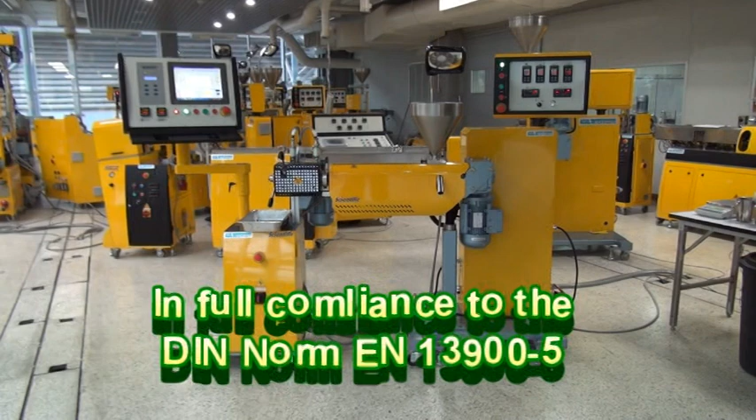This is our filter tester type LFT34GP with a 20mm extruder LE20-30. This filter tester is one which is in full compliance to the DIN norm. And with this video I will explain in detail how to run this filter tester.

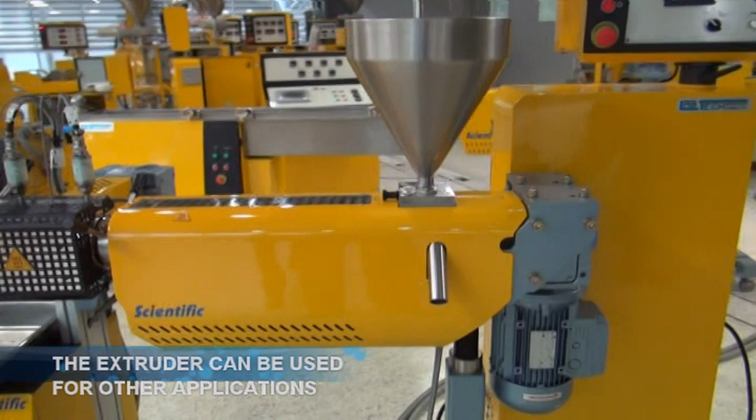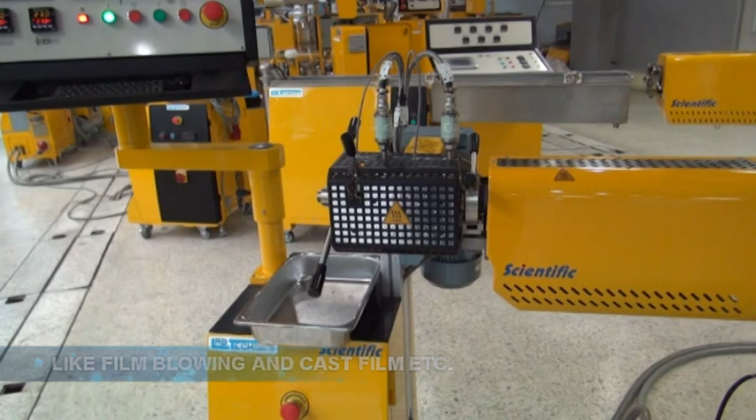So with this filter tester you have a separate extruder which has its own control panel, and the idea of this is that you can use this extruder for some other application. You can, for instance, connect it to a film blowing line or something else. And then you have also here the filter test head completely separated and only connected to the extruder with a C-clamp, as you can see here.

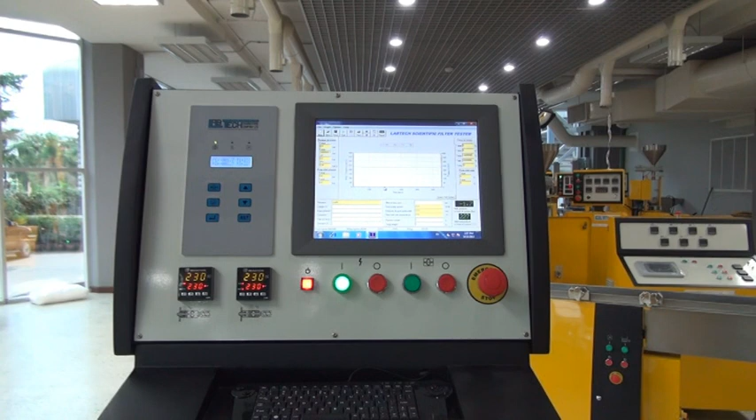And the filter tester here has its own control panel with a touch screen which will show the pressure build up and the graphs in real time during the test. I will go into detail on this later on.

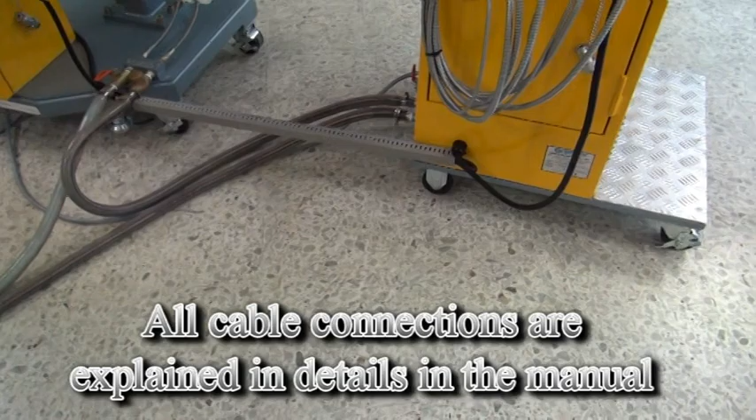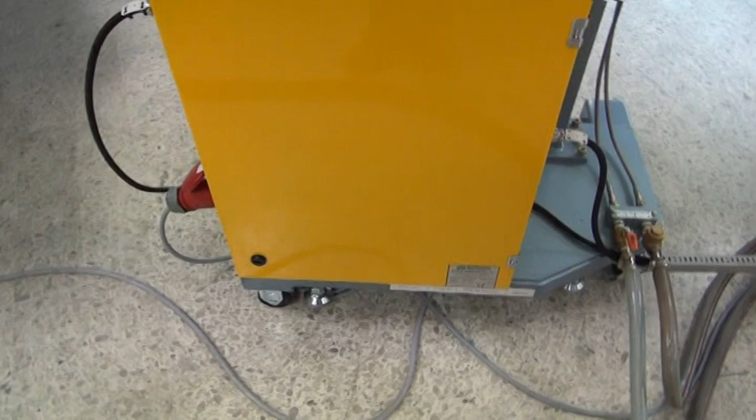We have here two main cables which connect to the extruder. The one up you see here, and another one on the bottom here of the panel. Both these cables are going to the extruder. One goes to the front side or front cabinet, as you see here, and the other one goes to the back, as you see here. And you should check in the manual. We explain exactly how to connect these, and it's very important that you follow the instructions in the manual.

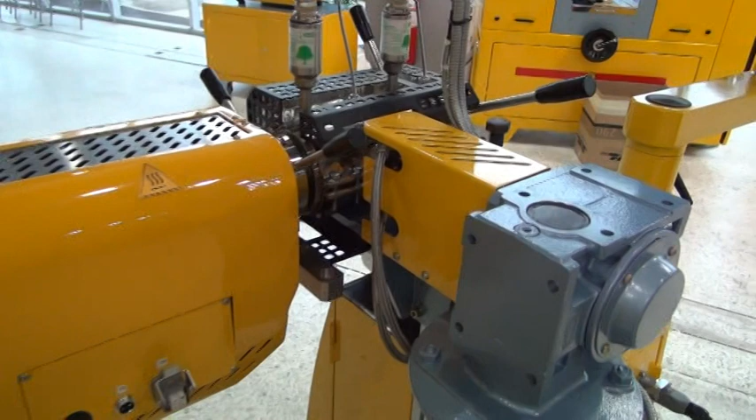And of course you also have to connect water. Water you have to connect to the filter tester also, because we use water cooling on the gear pump, on the shaft to the gear pump. Actually the shaft going into the actual gear pump body, and that one has to be cooled with water. And then on the extruder we have water cooling on the infeed barrel. So these connections have to be made also, but this is also mentioned in the manual.

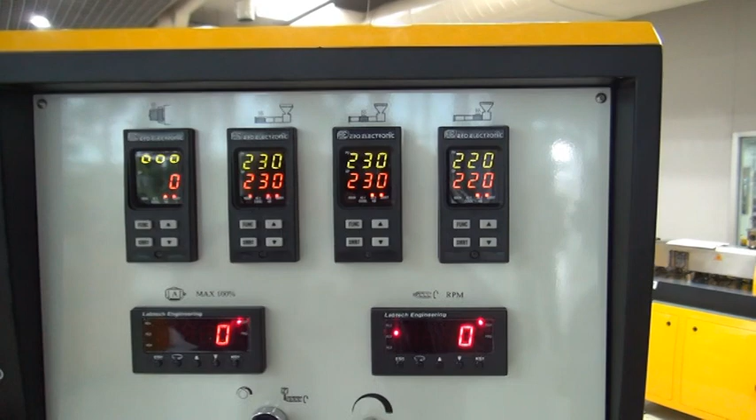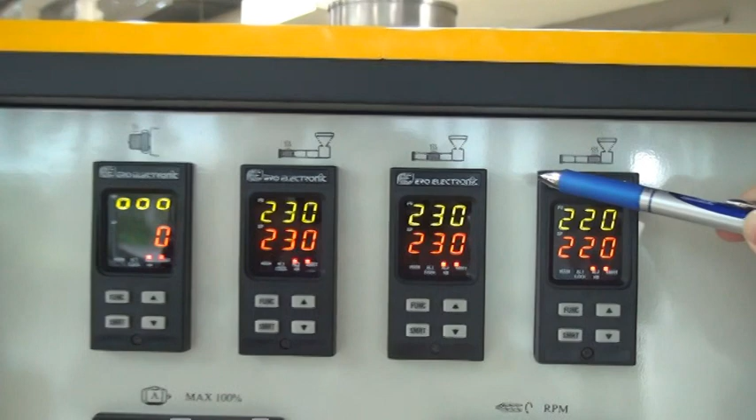So here on the control panel you have three active temperature controllers, and on top of the controller you can see the symbol which zone they are controlling. And then you have a fourth controller here which is not in use because the filter test head has its separate temperature controllers. So this one we don't need to use for this application.

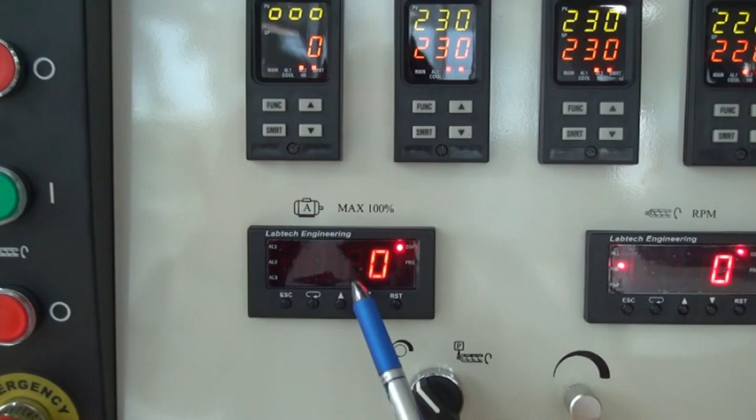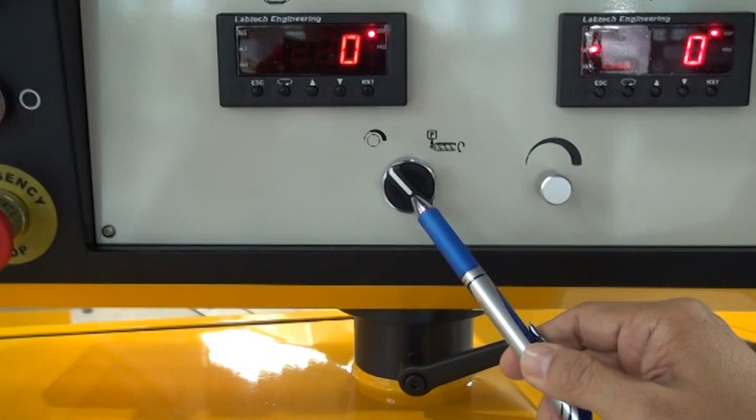And below here you have an instrument showing the max ampere in percent of full ampere for the motor. And here to the right you have a setting of the digital display of the RPM, screw RPM. And below there you have a potentiometer where you set the screw RPM. And then again to the left here we have a selector switch where you select to run the test in manual or in auto mode.

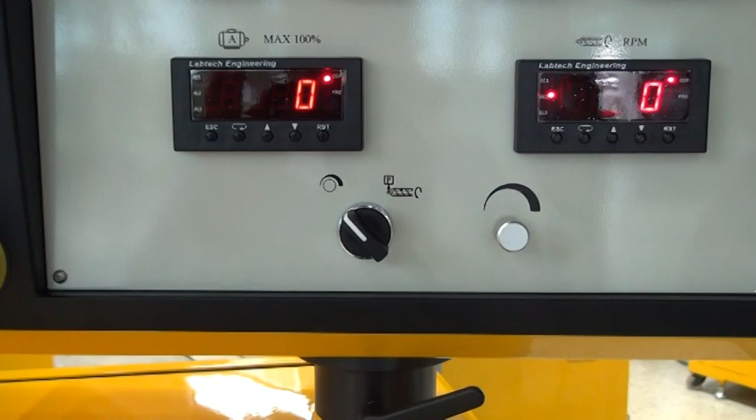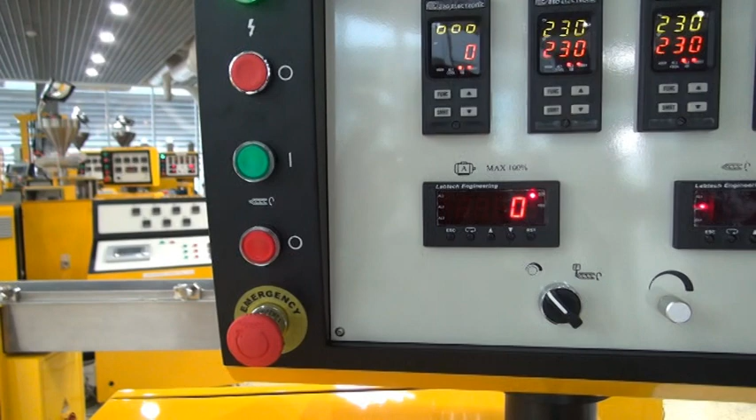Okay, and here on the left side we have the control buttons. You have one button to start all the controls. That is the upper green button, and then you have another green button below there to start the extruder screw. And below you have, of course, the stop button, the red one, and then you have an emergency button, which will stop everything when you press it.

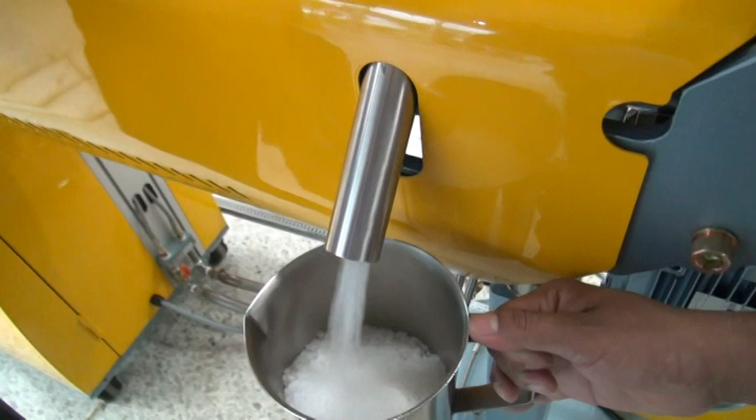The extruder has our standard hopper. It also has our standard mirror, so you can see the level of the resin inside the hopper. So below here you have the turret valve, and in this position as it is now, the material goes down straight into the infeed section of the extruder. And when you turn the hopper here, this is the position where you can empty out the hopper, and then you can turn further to a third position like this that will stop also the infeed, so it closes everything. And then we go back to the start position where the material goes down into the extruder.

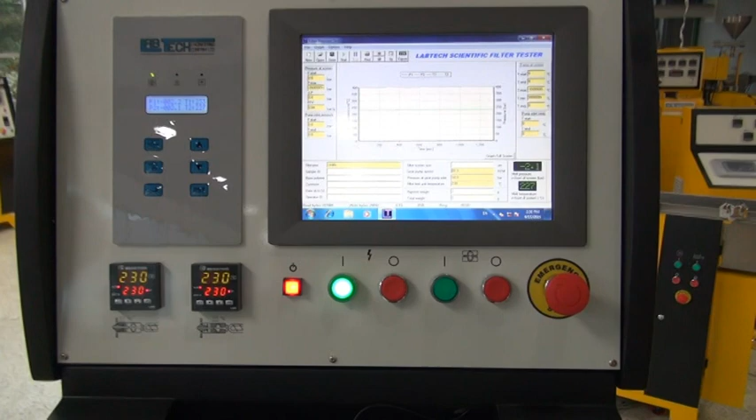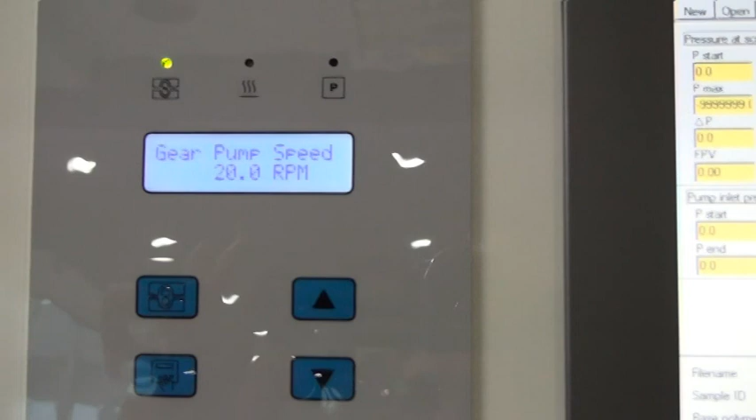So here is the control panel for the filter tester, and on the left here you have buttons to control the various functions for the gear pump and to set the temperatures. So here you press the gear pump button, and then you can increase or decrease the speed, and then you enter here, and then you have set that value, and then you can press the inlet pressure of the gear pump here, up and down, whatever value you want, but usually we run at 50 bar. That's the value we normally set, and then you enter that also here. Okay.

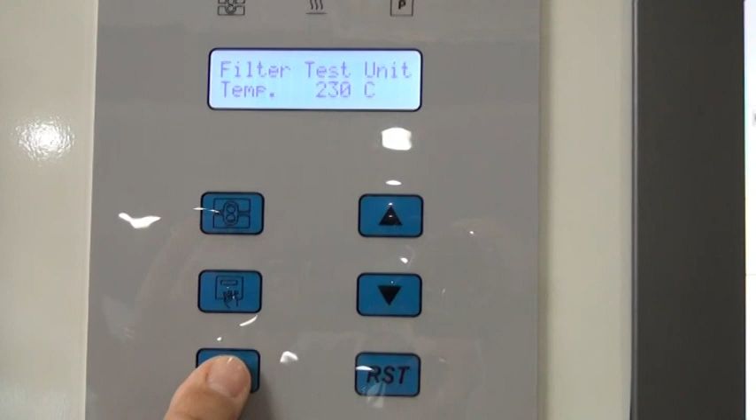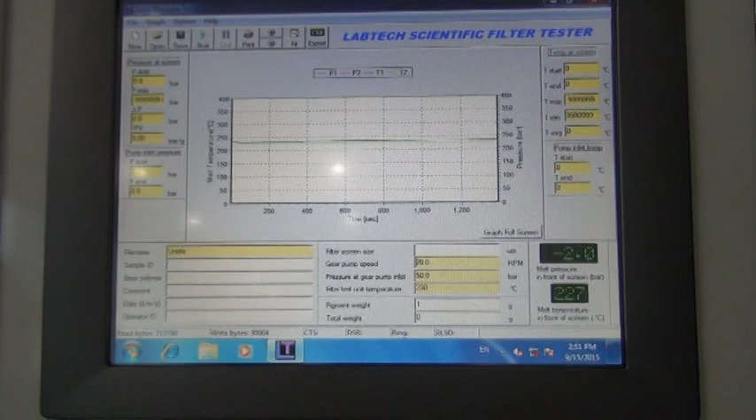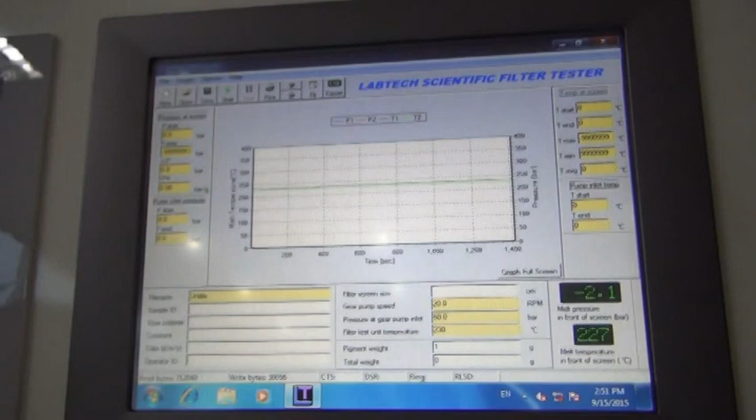And here you have the main screen where you will see the filter pressure building up on the screen. You will have a graph coming when we run the test. And on the lower part here, you can key in the value of your test. You can use a keyboard here to key in, but you can also use a touchscreen keyboard if you prefer that. Then you just press there, you get the keyboard, and then you can key in the values of the test you put.

So here in this window you can key in the file name and the sample ID and the base polymer you use and any comments you have on the test, and then you have the date and the name of the operator. And on the right side here you will have the data for the test, the gear pump. It will come in automatically once you set the gear pump speed, and the pressure of the inlet will also come up here, and filter test temperature.

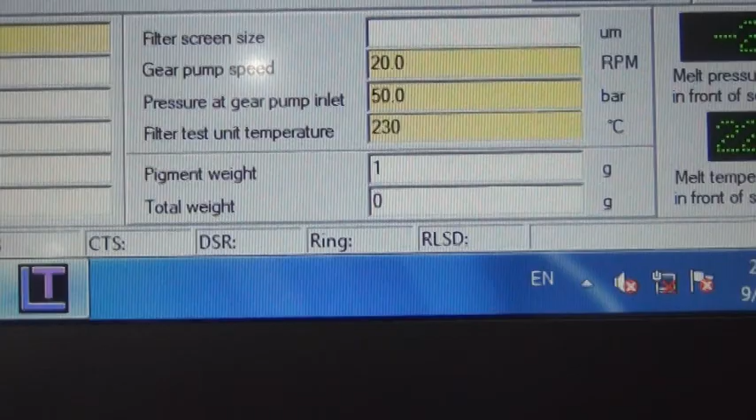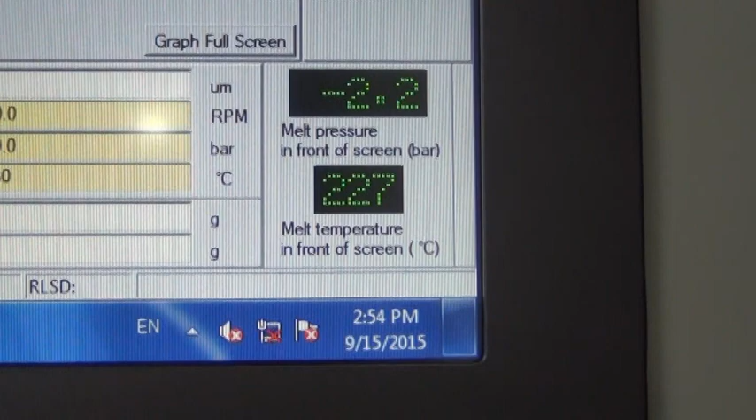And below that you will also key in the pigment weight of your sample and the total weight. And after you have keyed in that, this computer will calculate the filter test value. And here on the black windows you have the melt pressure in bar, which is shown when it's running. Now we're not running, so it shows a minus value actually. And then you have the melt temperature, which will also show the temperature of the melt once we run the line.

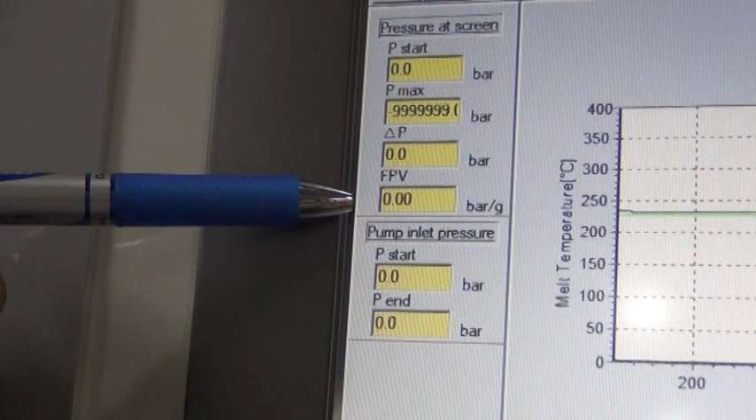On the left side you have the P start value, the starting pressure, and below that you have the maximum pressure for the test, and then you have the delta P, which is the pressure difference from start and end, and then we will calculate the filter FPV value once you have keyed in how many grams of the pigment you use in your master batch, so we have in the batch here.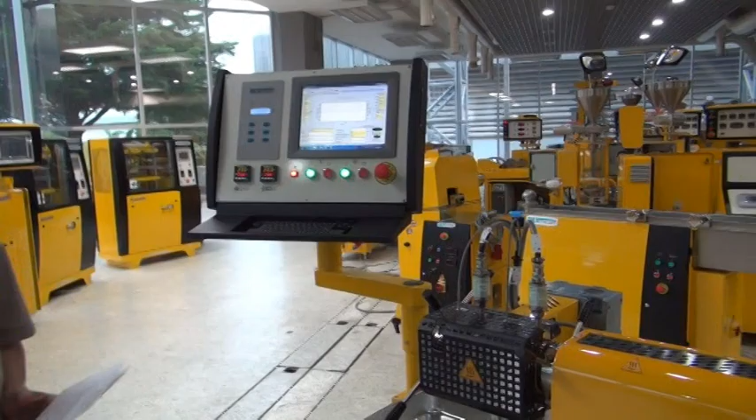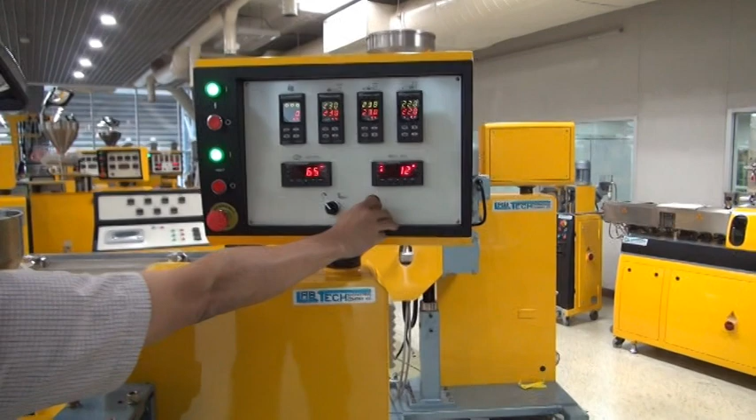So now we will start the test. We will start with cleaning the extruder, and the first thing we start is the gear pump, which we start up here on the control panel, and then we will start the extruder. Now we are running in manual mode, and we set the RPM to around 40. And virgin PP resin we have here in the hopper, which we will use for the cleaning, as you can see.

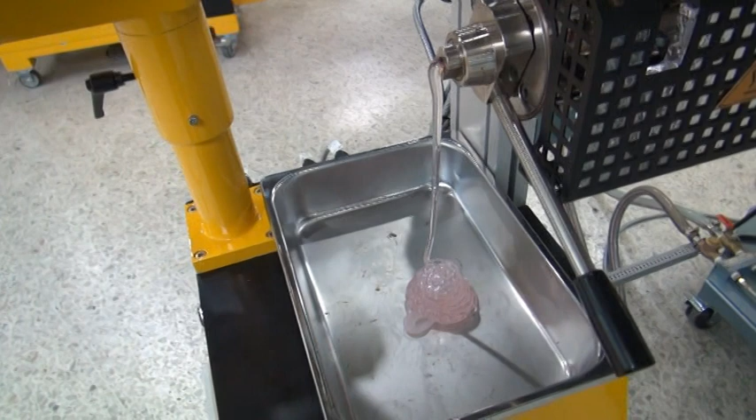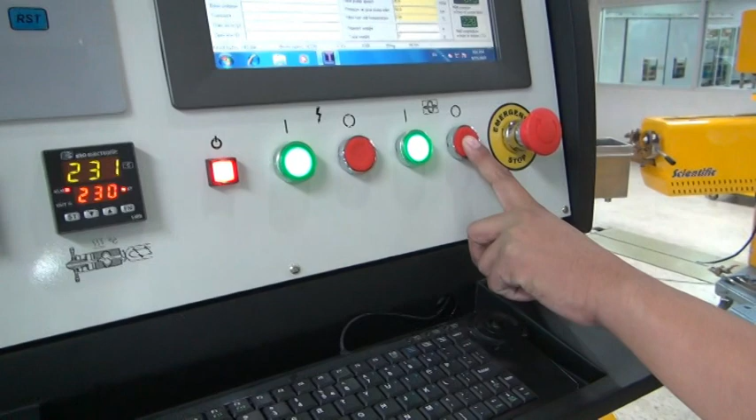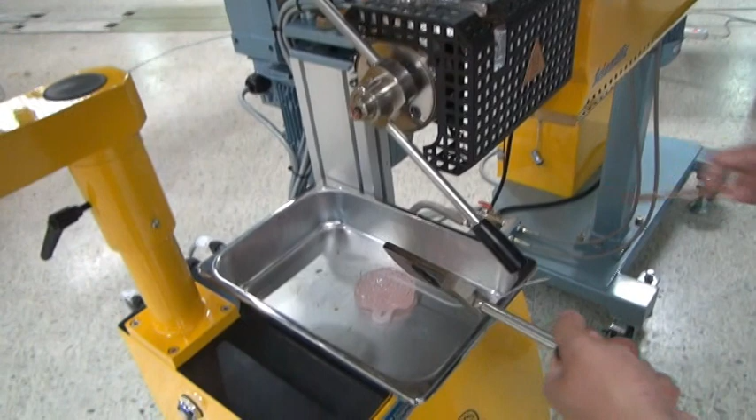So the screw is now clean, so we don't need to run more of the PP for cleaning. So we will stop the extruder now, and then we will empty out some of the PP resin here. Okay, and then we will change the screen. I mean, we will insert the screen because now we don't have any screen. We stop the gear pump, of course, when we insert the screen. Okay. And we have to clean the retainer a little bit.

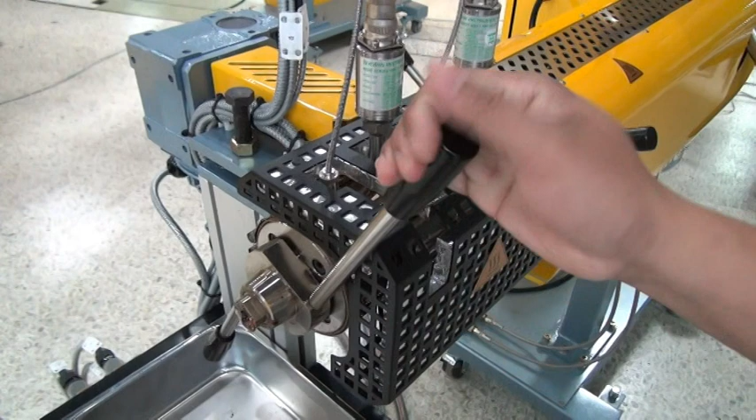So now we will put the screen into the retainer, and then we mount the retainer into the slot here on the filter test head, on there, and then we clamp the screen. So now we have inserted the screen. What is the size of the screen? 10 micron screen. Okay.

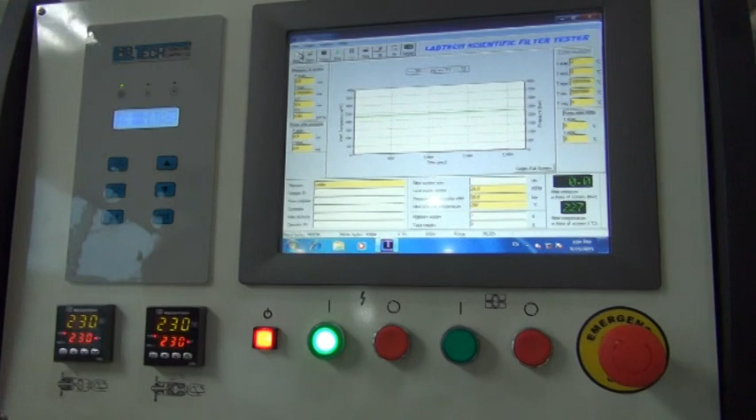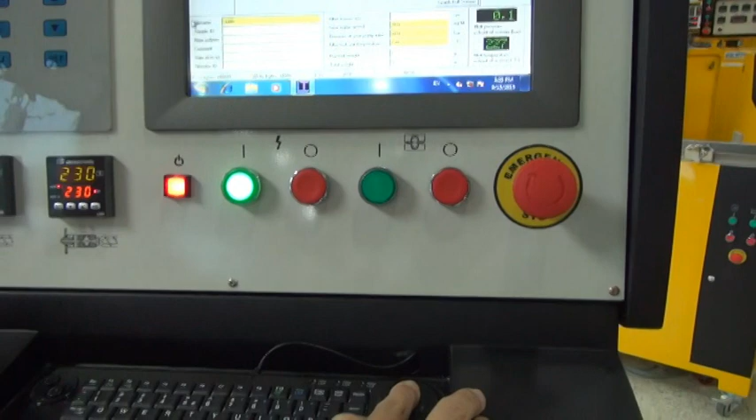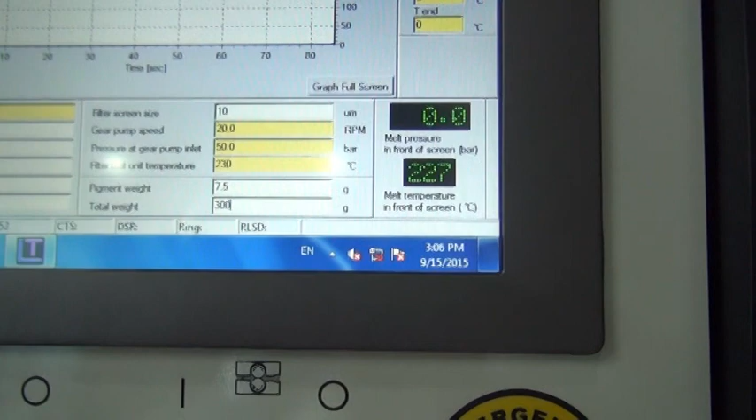So before we start the test, we press the reset button here to reset all the data on the control, and then on the screen here we will start a new test, and we press OK there, and then we key in the data for the batch. So here we have keyed in test data. It's only fictive anyhow, but the important thing we have keyed in here is that we have a 10 micron screen, and that the test has 7.5 grams of pigment weight, and the test batch size is 300 grams.

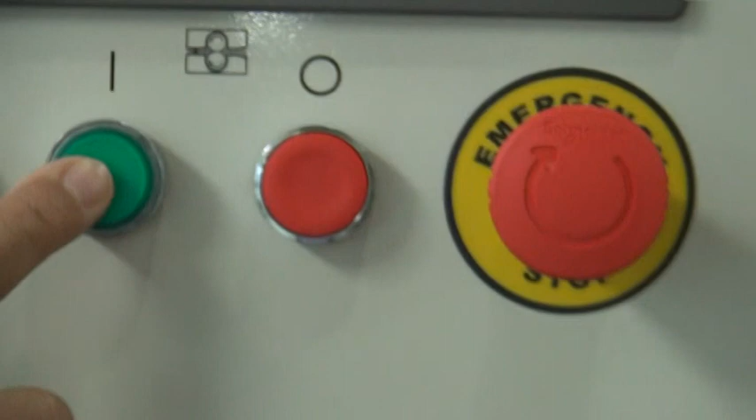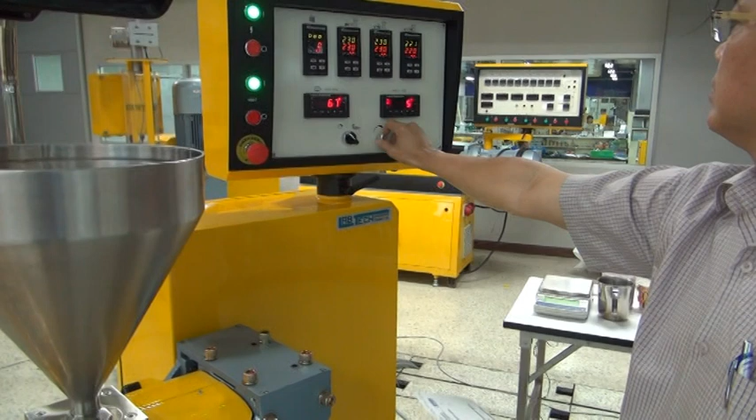So now we are ready to start the test. And we press the start button for the gear pump, and then we press the start button for the extruder, and we go up to 40 RPM, and we are still in manual mode. Now we go over to auto mode.

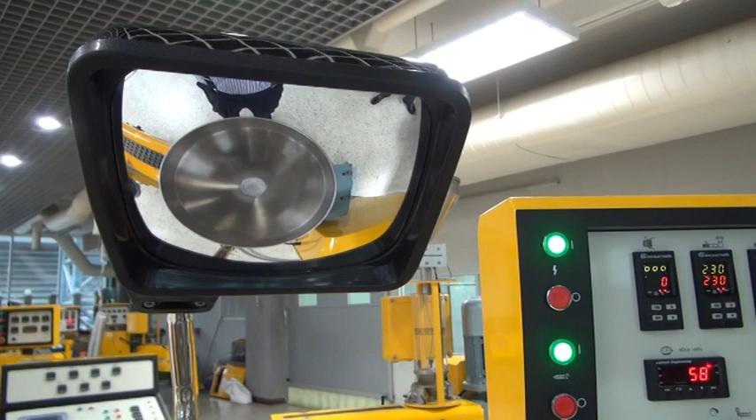When we look inside here, you can see when the hopper starts to get empty, it is time to fill in the test batch. And that we do. No, it should be there. Oh, okay. Well, we did that already. So here we have the test batch.

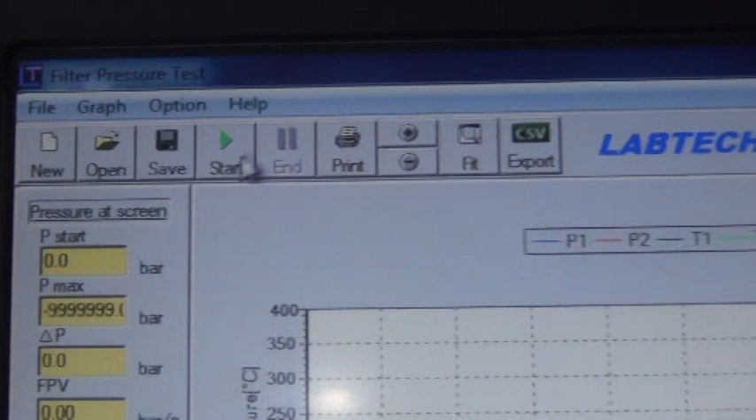So now we will watch here until the color comes out from the melt here, then it's time to start the test, and then we press the start button on the screen, the one you see up here. This one you press once you have seen the color coming out, or you press OK here. Okay. So we are still waiting. Now here the color is coming out, so it's time to press the start button. So now the actual test has started.

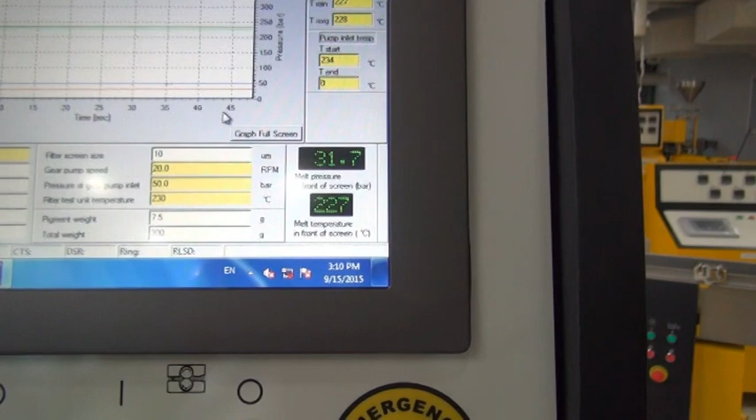And we should eventually see a pressure curve coming, but not yet. It doesn't show yet. You can see that this one has started to come up. Now it's 30 bar, 31 bar, 31.7. We started at 30 bar. So it will come up slowly, and there will be a graph plotted eventually. You see the lower red line here is the pressure line, and this one should climb up.

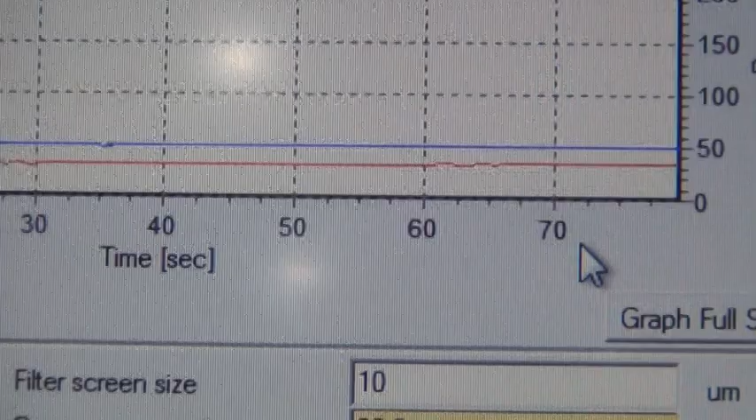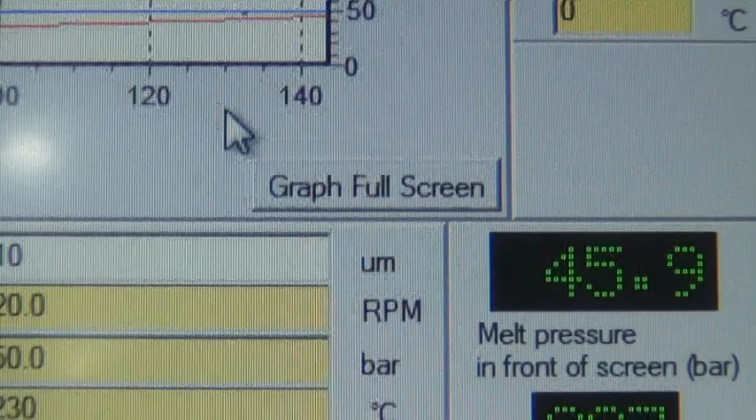With time, we have to wait and see. Pressure is now 33.7, on the 34 bar, so it's climbing. Okay, we have now been running for a few minutes here, and the pressure is now up to 45 or 46 bar, and you can see the red line here is climbing.

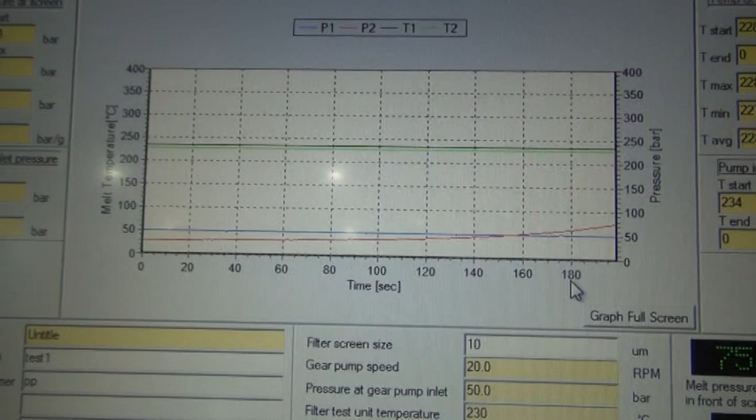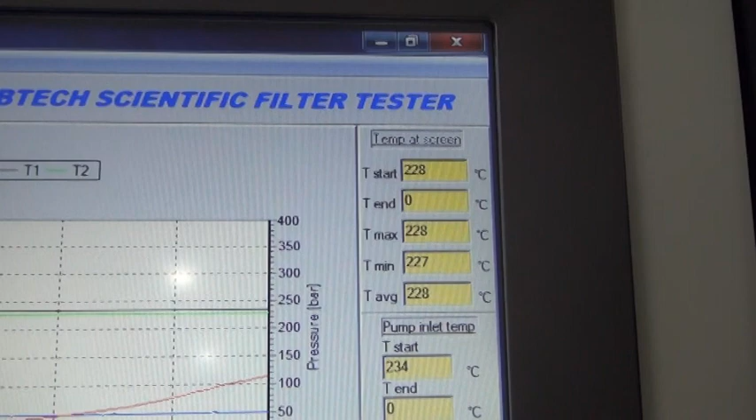Also, I didn't explain the graphs here, or the lines you have here. The blue line you see near the red line here is the actual pressure on the inlet pressure of the gear pump, and up here the green line you see is the melt temperature. Now you can clearly see that the red curve is climbing, and we are already up to 110 bar. And also the melt temperature is constant all the time, which it should be. It's 228 degrees, as you can see here.

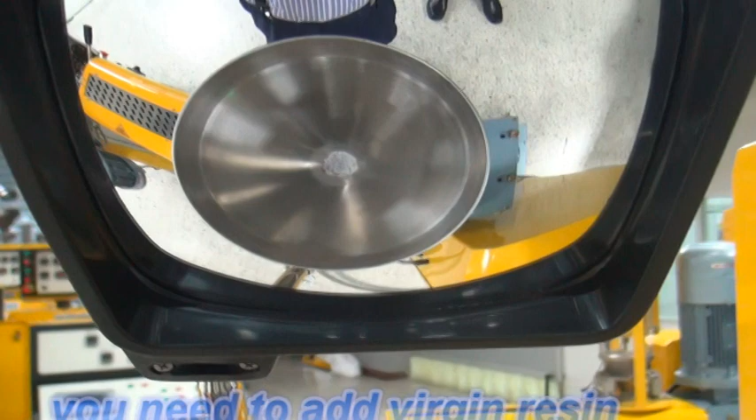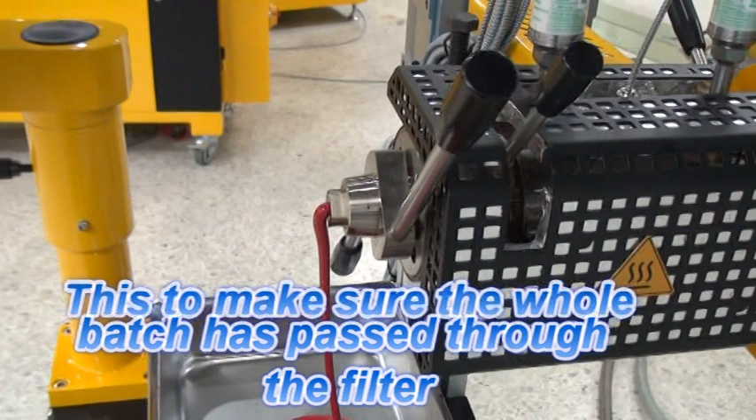So now the test batch is almost finished, and then we will add another 200 grams of virgin resin, which is going to push out all the material which you have in the screw. So you can be sure that you test the whole batch of 300 grams. So the pressure is still climbing quite nicely here. We are almost up to 200 bar now, as you can see. And the test is still going on.

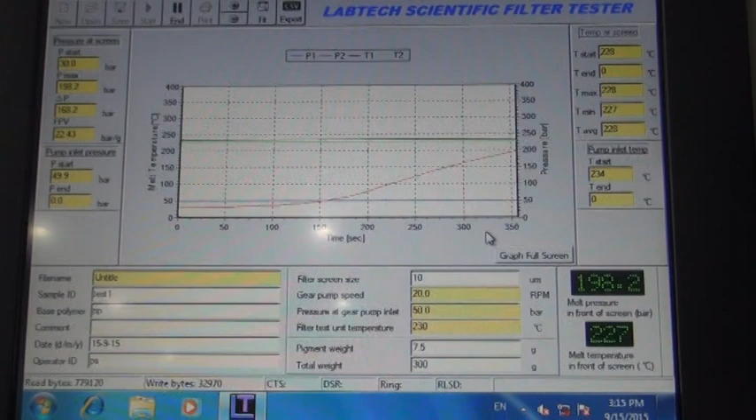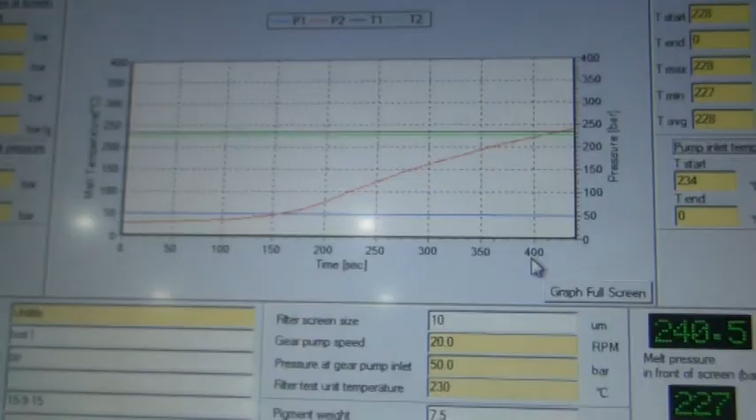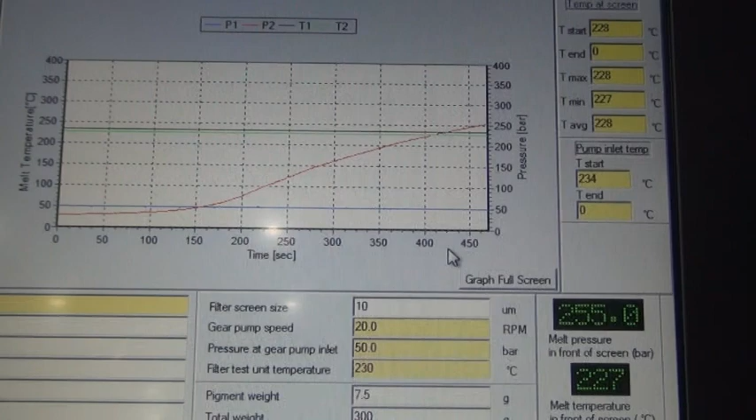And the purging batch here of 200 grams is still in the hopper. And we can stop the test once this batch is almost finished, because then we are sure that all the master batch has gone through the filter and been tested. You can see on the lower ruler down here how many seconds the test has taken, and from there you can see we are now at 400 seconds, and it's still going on. We are 500. Now we are at 450 seconds. And the curve is still climbing. We are up to 255 bar.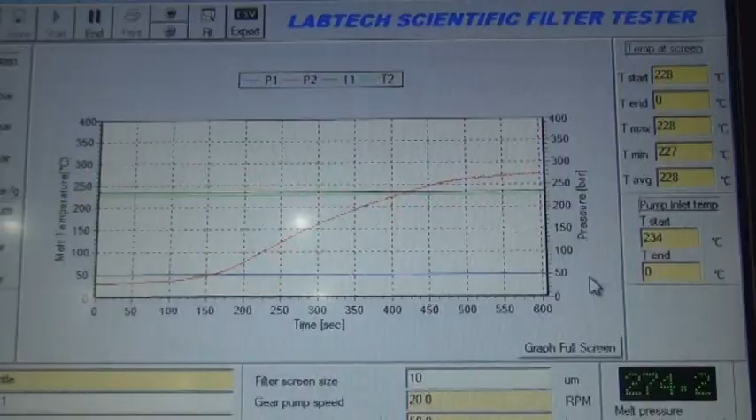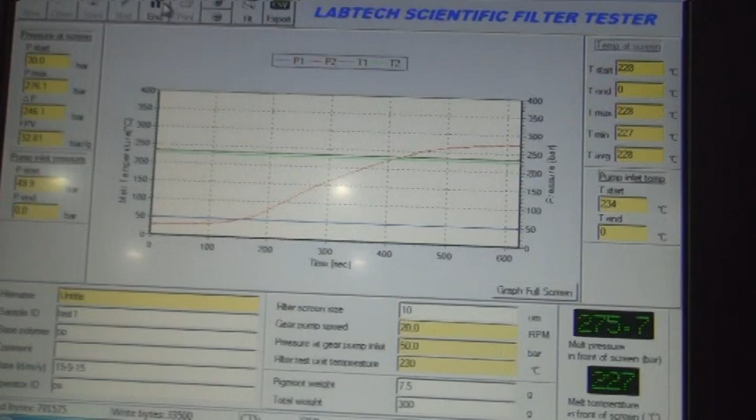So you can see that the graph starts to level out, which means that most of the master batch has already passed through the filter, and now we have more of the cleaning resin or the virgin resin coming through the filter. So now you can see that pressure is leveling out completely. It's not going up anymore. It's still here 275, 274. So now we can actually stop the test, because not more will happen. Yep. You press the stop button here. And then we can save. And then you save the curve or the graph or the result.

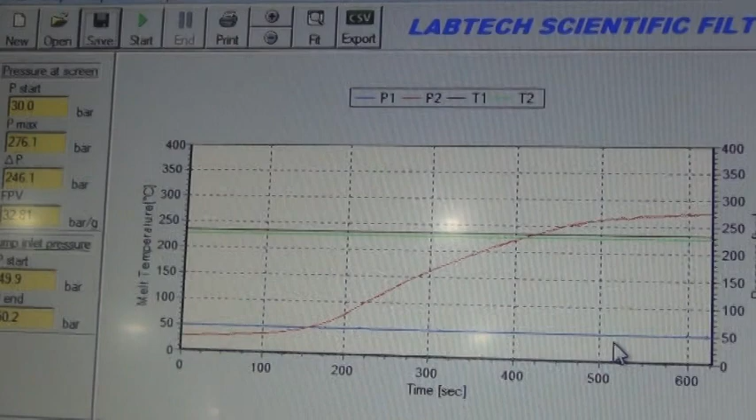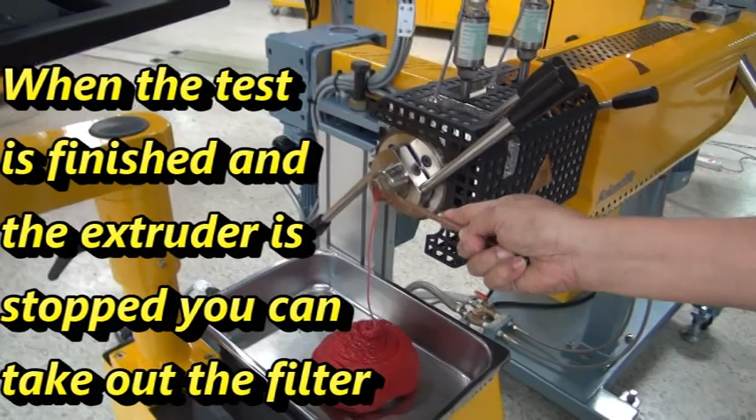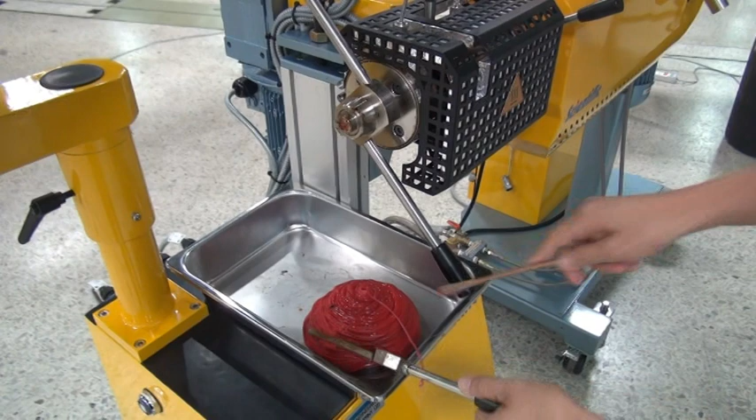Okay, now we have saved the test. So now we are ready to stop the extruder, stop the gear pump, and take out the resin and fill in some cleaning resin. You can see here that the hopper is empty already. So the test is now finished, so we can take out the filter, and then after we take out the filter, we put back the retainer, so we can run a cleaning batch through the extruder, and then you fill it up again, and you fill it up with resin.

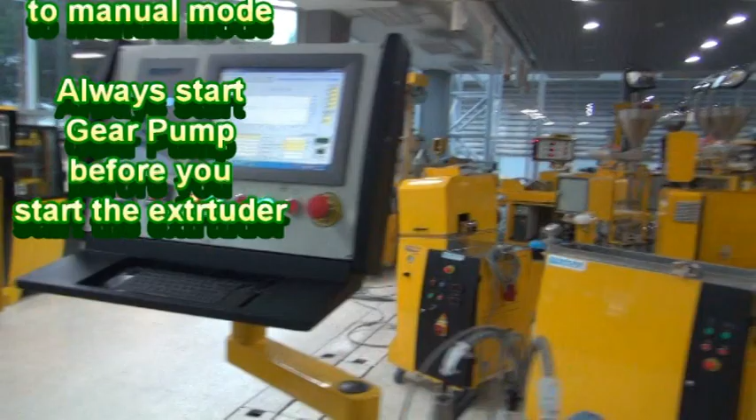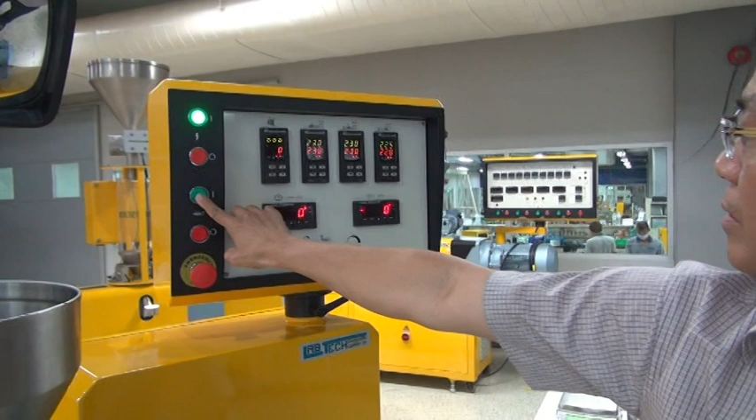You switch over to manual mode on the extruder, and you start the gear pump, and then you start the extruder at 40 RPM, where we are now. Please note that you have to go down to 0 on the RPM before you start the extruder, otherwise it will not start. So you're going to set the dial to 0 RPM, and then you start the extruder, and then you go up again to 40 RPM, and now you are in manual mode.

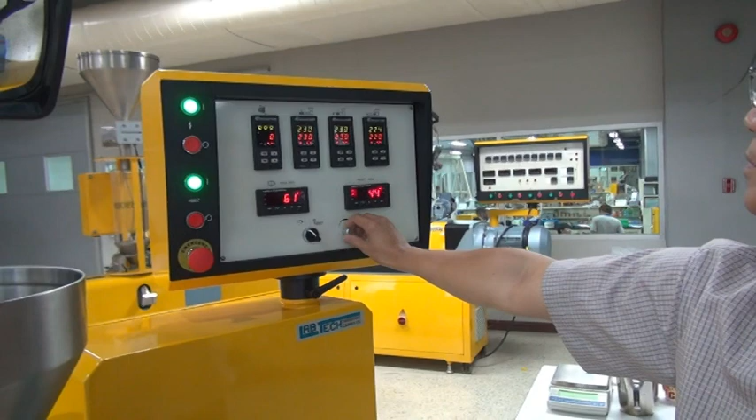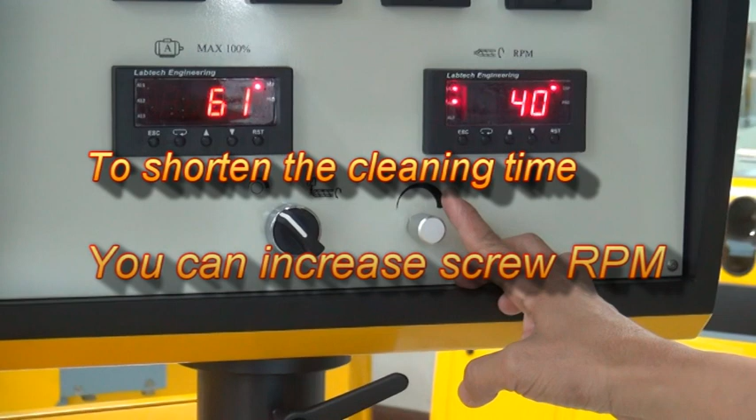You can see the red color is disappearing here. The cleaning, the purging resin is coming out and taking away the color. So it will be fairly easy to clean. You don't need many, maybe a few 100 grams, 300-400 grams to clean it between each batch. And if you want to shorten the cleaning time, you can increase the RPM of the extruder. You just purge it out faster. Okay.

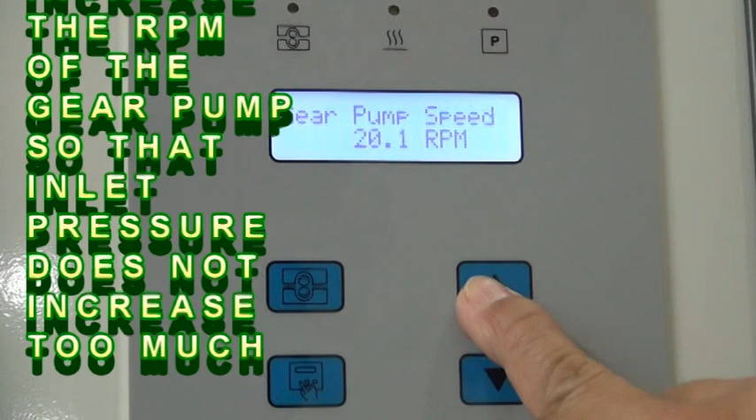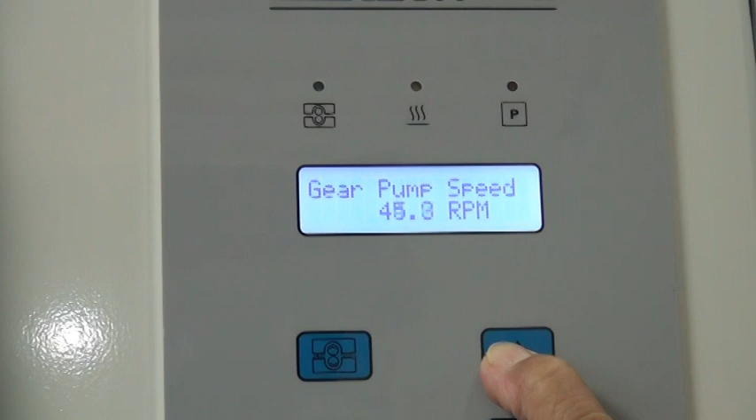But please remember that when you increase the screw speed, you also have to increase the speed of the gear pump. Otherwise, you only build up a high pressure on the inlet of the gear pump. So that we are doing now. And this is still during the cleaning process. And then you can see that P1 inlet pressure is only 4.9 bar, so that is fine.

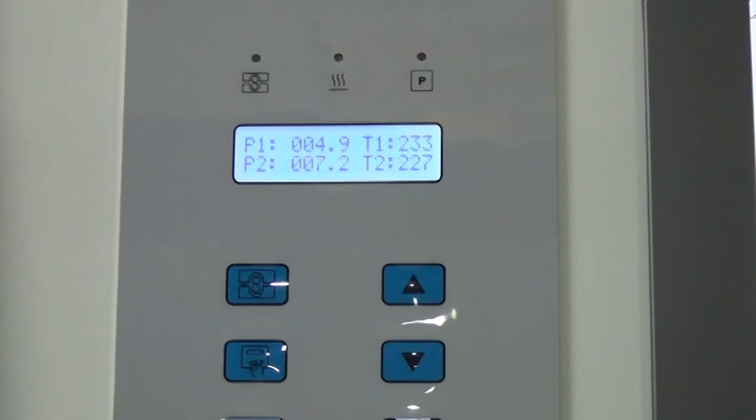So again, now under the cleaning process, we have increased the screw RPM to 109, as you can see here, and then we have increased the RPM of the gear pump, so that, I don't know, it doesn't show here. Oh, here, we are on 50 RPM on the gear pump. So that will help to clean out the compound faster, and as you can see here now, it's practically clean, and you can run the next batch very soon after this.